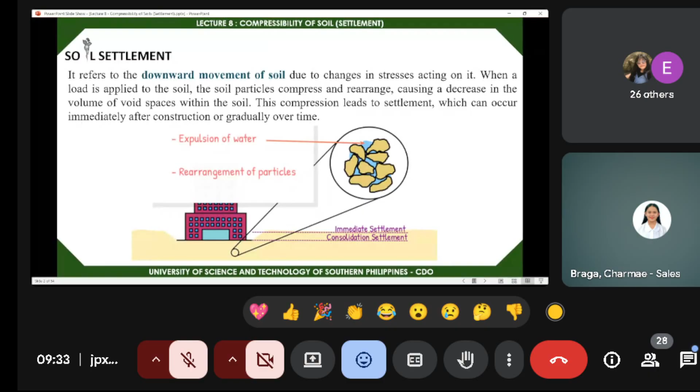And the particles also will be rearranged. This compression towards the soil leads to settlement, which can occur either immediately after the construction or gradually over time.

So if there is stress increase in saturated soil - saturated meaning the soil's voids are fully occupied with water - this causes an immediate increase in pore water pressure.

So the pore water pressure increases when there is an increase in the stress or load applied. In highly permeable sandy soils, drainage occurs quickly, leading to immediate settlement, since the drainage is very fast, the soil particles experience immediate settlement.

Both elastic and consolidation settlement happen simultaneously due to rapid water drainage, so elastic and consolidation settlement happen simultaneously.

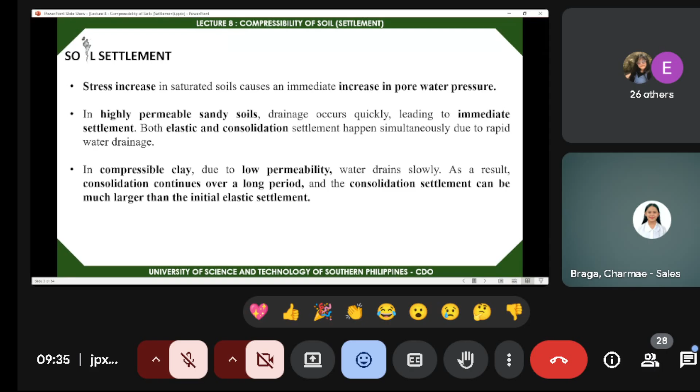But in a compressible clay, due to low permeability, water drains slowly. As a result, consolidation continues over a longer period of time - the drainage takes longer for clay soils - so the consolidation settlement can be much larger than the initial elastic settlement.

So there are three categories of settlement: immediate settlement, consolidation settlement or primary consolidation, and creep settlement or secondary consolidation. The immediate settlement is the most instant response of the soil to the new stress condition.

Again, sandy soil has immediate settlement due to drainage. Primary consolidation is applicable to saturated soil, where as water is pushed out from the soil pores, the soil particles rearrange and come closer, resulting in further settlement, which is called consolidation settlement.

Are you seeing my slide?

Yes, okay. Creep settlement, or secondary consolidation, happens when some soils continue to reduce their volume for a long time, even after the excess pore water pressure has been dissipated and the consolidation settlement is complete.

So once the consolidation settlement is finished, all the water has been expelled from the soil particles, but it will continue to compress or settle slightly more, although very small, but it will take a very long period of time. So we call this secondary consolidation.

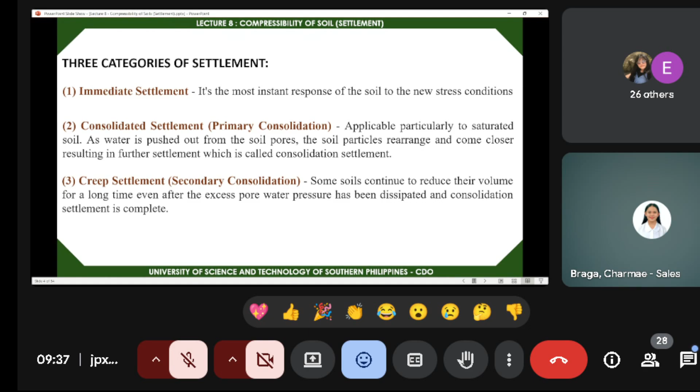Secondary consolidation starts at the end of primary consolidation. Primary consolidation ends when there is no more water that can be compressed or expelled out of the soil particles. Okay, so there is this immediate settlement equation.

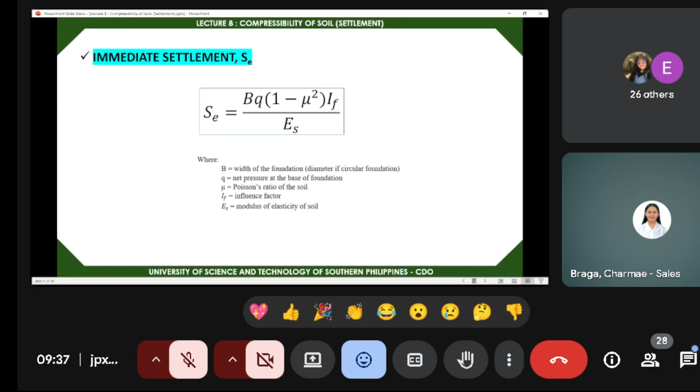S sub E, the immediate settlement equation, is equal to B times Q times 1 minus the square of Poisson's ratio, multiplied by this influence factor I sub F, all over the modulus of elasticity of the soil. This is the formula for the computation of immediate settlement.

For the primary settlement, or S sub C, consolidated or primary settlement, it is delta E, the total change in void ratio caused by the additional load application, over 1 plus E sub O, where E sub O is the void ratio before the application of load, or the in-situ condition of the soil, then multiplied by the thickness of the clay layer.

Take note, class, that it is very specific as H sub C, thickness of the clay layer, since we are talking about the primary settlement. Primary settlement is usually encountered when the soil particles or soil type is clayey, so it will undergo primary settlement.

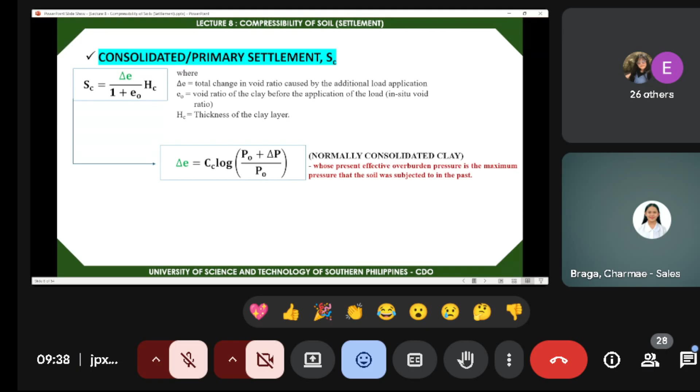The formula for the total change in void ratio could be C sub C times the logarithm of P sub O plus delta P, over P sub O. This is for normally consolidated clay, and the present effective overburden pressure is the maximum pressure that the soil was subjected to in the past.

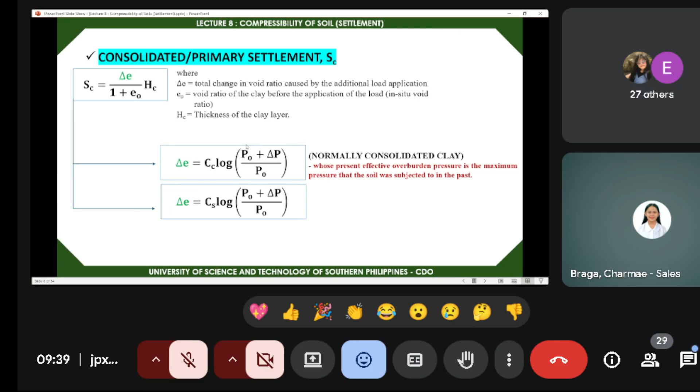That is P sub O, the initial effective overburden pressure. The effective overburden pressure is the maximum pressure that the soil was subjected to in the past, that's P sub O. Of course, delta P is the change from the previous condition.

If the soil is an over-consolidated clay, and its present effective overburden pressure is less than what the soil experienced in the past, then we use C sub S times log of P sub O plus delta P over P sub O.

When the sum of the maximum overburden pressure in the past, P sub O, plus delta P is less than P sub C, we consider delta E as equal to C sub S times the log of PO plus delta P over PO. You have to take note of this for the total.

For over consolidated clay, you have to add this delta E if the clay is over consolidated. Take note class, we're talking of clay, because it is primary settlement. Only clay soil experiences primary consolidation or settlement, whether normally or over consolidated.

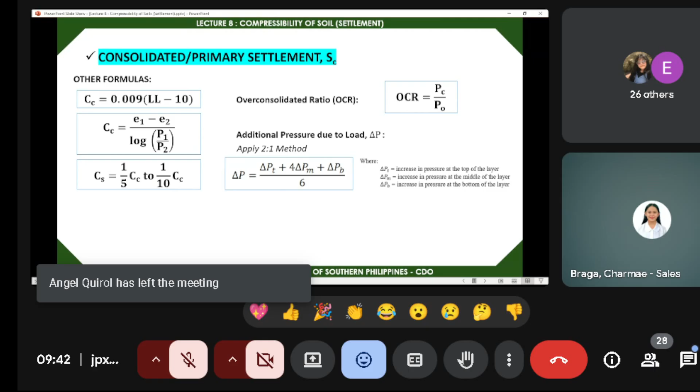You can also solve it using this equation: delta P sub T plus 4 times delta P sub M plus delta P sub B, where T stands for the top layer, M is the middle layer, and B is the bottom layer, divided by 6. That is the delta P computation.

C sub C is the compression index, and take note C sub S is the swell index, where the swell index is usually 1/5 of the compression index. If there is no given value, it can be assumed as 1/5 of the compression index.

PO is the overburden pressure or the effective stress, and delta P is the additional pressure due to load. P sub C is, as I mentioned, the pre-consolidation pressure or maximum effective past pressure.

So again, we can compute for the compression index. We can compute for the settlement by computing the compression index and swell index.

Having this delta E, it's important that you know what to use for delta E. The change in void ratio has this formula, using the compression index and the swell index.

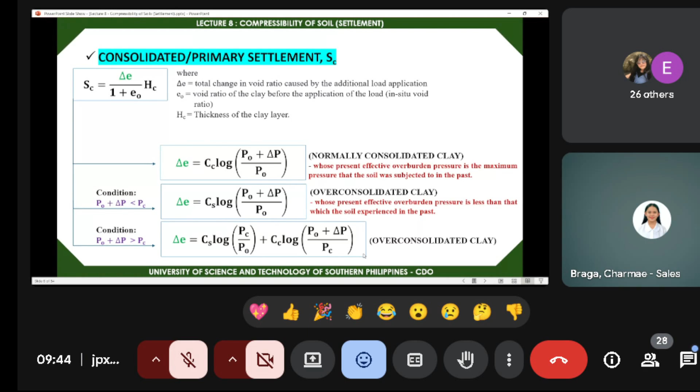With particular conditions of the clay, please familiarize yourself with the symbols, where OCR is the over consolidated ratio.

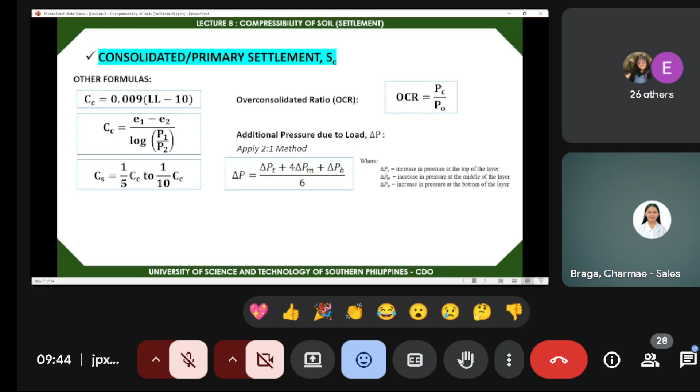OCR simply equals P sub C over P sub O, where P sub O is the overburden pressure over effective stress, and P sub C is the pre-consolidation pressure, which is the maximum effective past pressure before the load is applied. Delta P is the additional pressure due to the load.

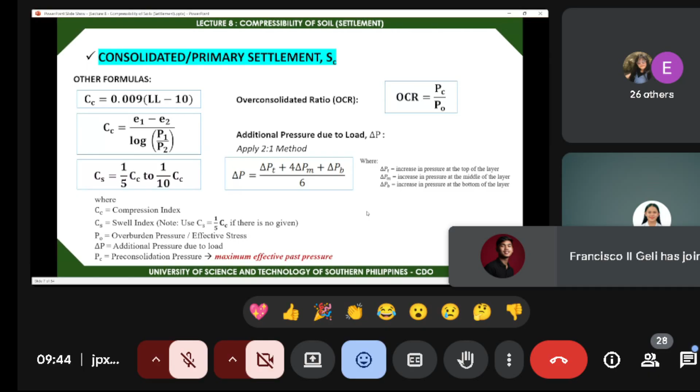Delta P can again be solved using the pressure at the top of the layer, increase in pressure at the top of the layer, the middle of the layer, and the bottom of the layer. For secondary settlement, we have this formula S sub S for the secondary settlement, where there is already the secondary compression index.

This is simply delta E over the log of T2 over T1, where T2 is the time after completion of primary settlement and T1 is the time for completion of primary settlement.

After the completion of primary settlement, T1 marks the actual end of primary settlement, which happens when there is no more water being expelled from the soil. That is the initial period, or also the beginning of the secondary settlement.

Again, take note of the formula for the secondary settlement. It is simply the secondary compression index divided by 1 plus E sub P, where E sub P is the void ratio at the end of the primary consolidation, or simply E sub O minus delta E.

Times the log of T2 over T1.

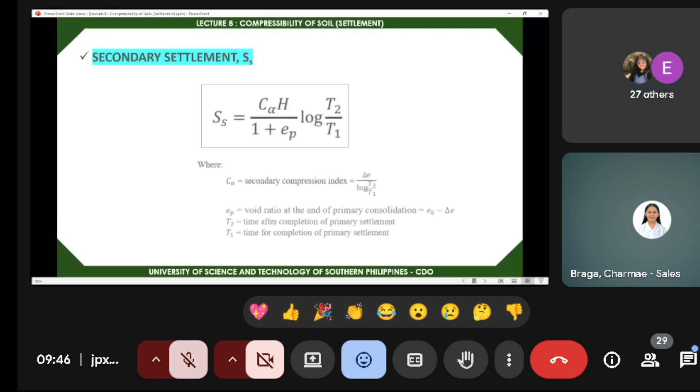So, for an example application, the first example of the compressibility of soil or settlement.

If you have the soil profile in this figure, it has a 9-meter layer of sand underlain by a 6-meter layer of clay.

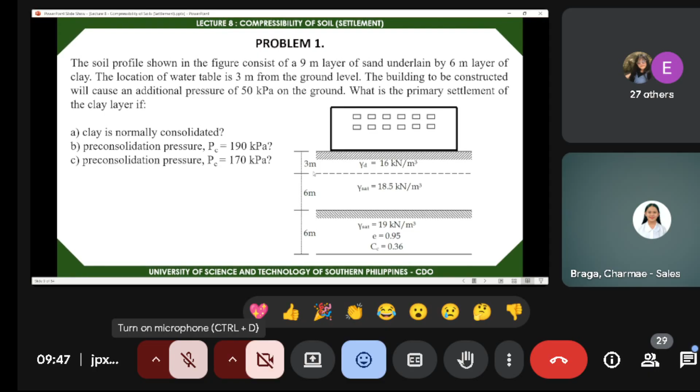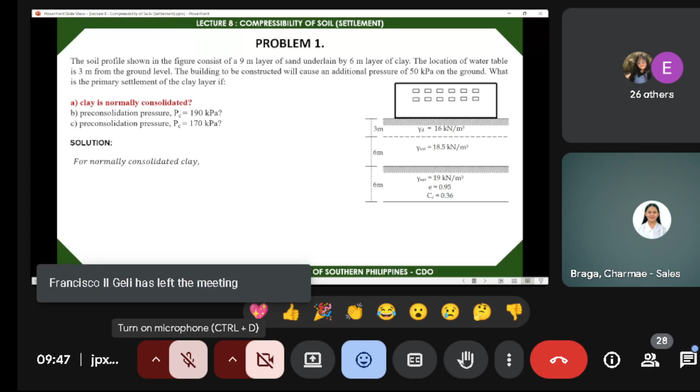The location of the water table is 3 meters from the ground level. The building to be constructed will cause an additional pressure of 50 kPa in the ground. So what is the primary settlement of the layer if the clay is normally consolidated?

Using the formula, for this primary settlement, S sub C, you have delta E over 1 plus E sub O, times H sub C.

Take note that this layer is at mid-height of the clay, so up to the mid-height of the clay. There's a 9-meter layer of sandy soil, then the clay layer is 6 meters below. This clay has a compression index of 0.36 and void ratio of 0.95.

So the location of P sub O for normally consolidated clay is simply at the mid-height of the clay layer. So our PO is again this effective stress.

16 times 3, and then 18.5 times 6 plus 19 times 3. Since it's saturated, you have 19 times 3, and then minus 9.81 of 6 plus 3.

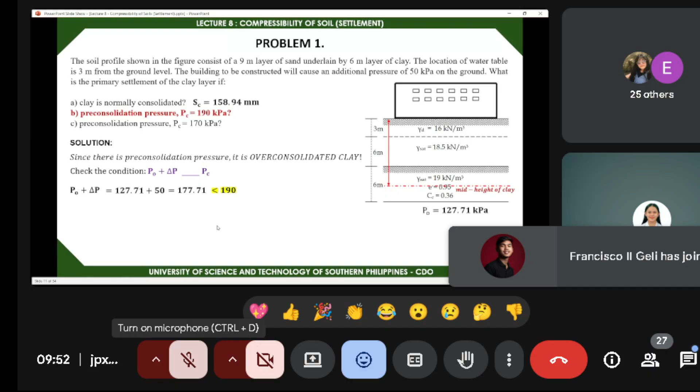The pre-consolidation pressure is the past pressure applied to the soil to determine its settlement, pre-consolidation. So you have there less than 190.

Therefore, we use this settlement formula for the condition of delta E, which equals C sub S log.

So we can see from this condition in our previous slide which will indicate what delta E formula should we use. So C sub S log of PO plus delta P over P sub O.

Therefore, if you input all the given values, since C sub S is not given, we assume it's just 1/5 of C sub C. Then log of PO, which we determined a while ago, 127.71 plus 50 over 127.71.

Then divided by 1 plus E sub O, multiplied by the height of the clay layer, which is 6,000. So again, why is it 6,000 for the height, the H sub C? Because we're talking about settlement, so if you have settlement, it occurs in the clay layer.

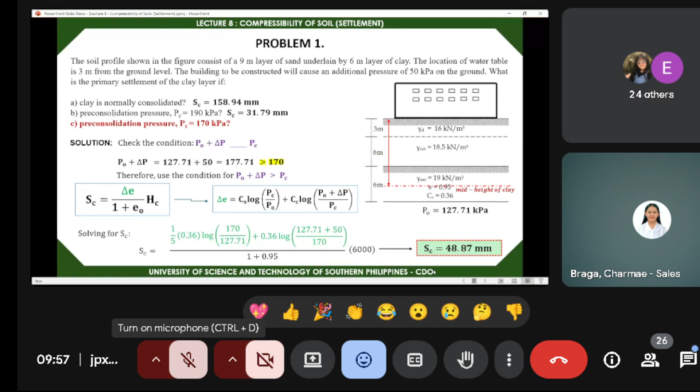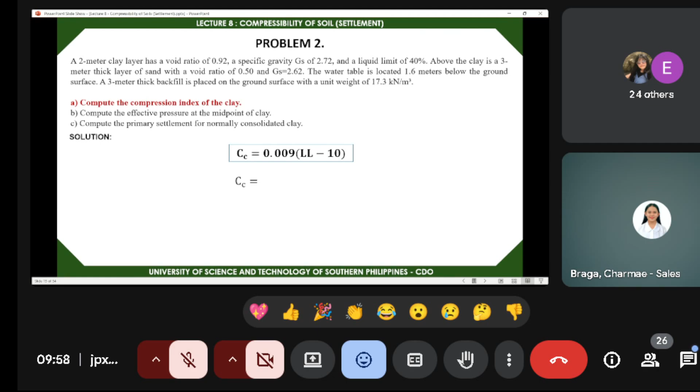Okay, so another example: there is a 2-meter clay layer that has a void ratio of 0.92, specific gravity of 2.72, and a liquid limit of 40%. Above the clay is a 3-meter thick layer of sand with a void ratio of 0.5 and specific gravity of 2.62. The water table is located 1.6 meters below the ground surface, and a 3-meter thick backfill is placed on the ground surface with a unit weight of 17.3 kilonewton per cubic meter. Please wait for a while, I need to call someone.

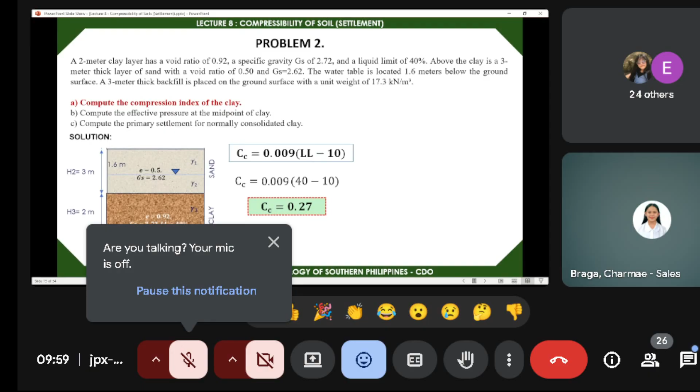Yes, sir. Yes, sir. Uh, yes, sir, 10 o'clock, sir? Yes.

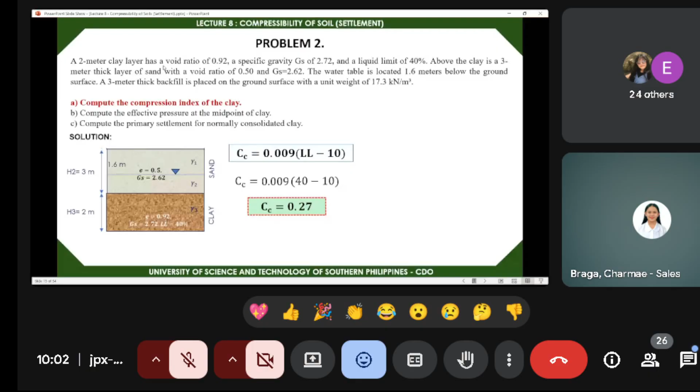What is required is to compute for the compression index. Using the compression index formula 0.009 times liquid limit minus 10, you can get the compression index of the clay layer, which is 0.27. The clay has a liquid limit of 40% given, so this 2-meter clay layer has a liquid limit of 40%. So you have there the C-sub-C.

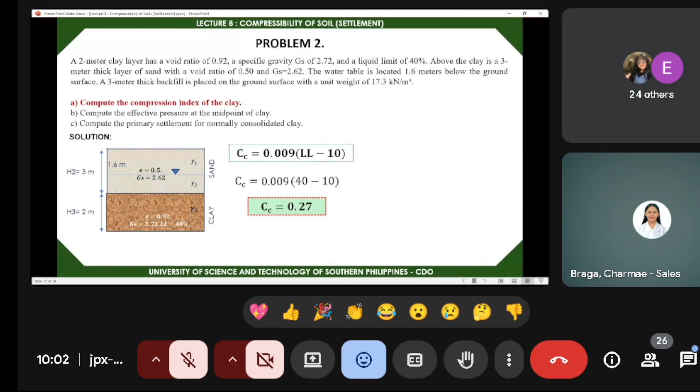The second requirement is the effective pressure at the midpoint of the clay. Where do we get the effective pressure at the midpoint of the clay? Take note there is a 3-meter thick backfill on the ground surface. So what will happen in the computation of effective pressure at the midpoint of the clay? You need to apply the 17.3 kilonewton per cubic meter backfill, with a thickness of 3 meters. If you multiply that, you get a pressure of 51.9. So that backfill is equivalent to a surcharge.

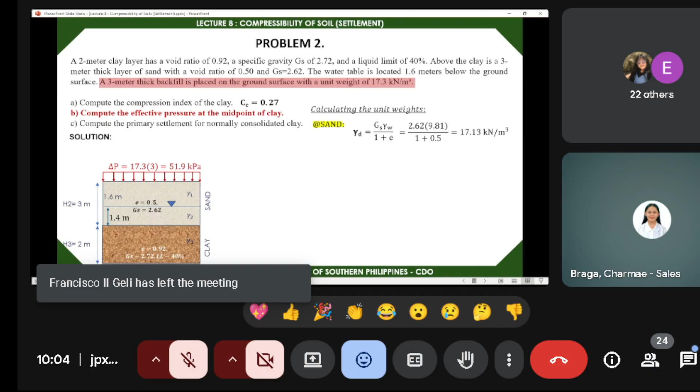So, let us compute the effective pressure. For the sand, there's no unit weight given, but if there's a void ratio and the specific gravity is given, then we can compute the unit weight of the soil. So for the dry condition of the unit weight of the sand, based on the given specific gravity and void ratio, we say that the dry unit weight of sand is 17.13.

Let's continue. So for the clay layer, we can still compute the saturated unit weight of the soil using the formula, don't forget it. So let's start with the calculation of the effective stress at the midpoint of the clay.

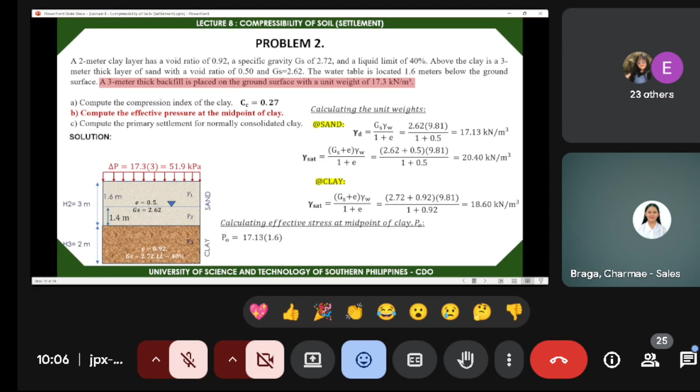Okay, so when calculating the effective stress, you have 17.13 at the sand layer, the dry portion, the dry unit weight of sand from 1.6. Then you have 20.40, that is the saturated unit weight, which has a depth of 1.4 meters.

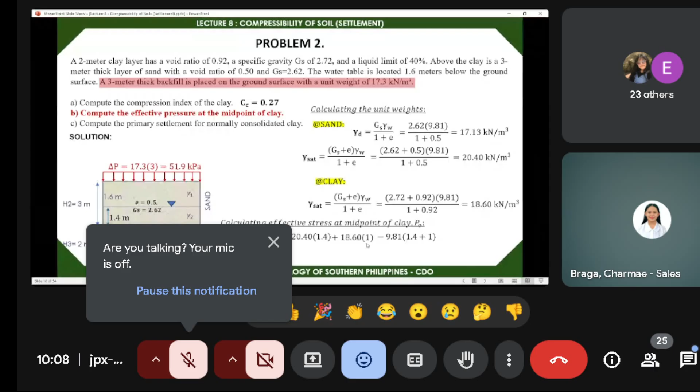And then 18.6, where this is the gamma sat of the clay. Since the clay layer is 2 meters, at the mid of that is just 1 meter. And then minus 9.81, the unit weight of water, at depth 1.4 plus 1. This portion in the clay should be deducted since it's effective stress. Therefore, our P sub O is simply 51.02 kPa.

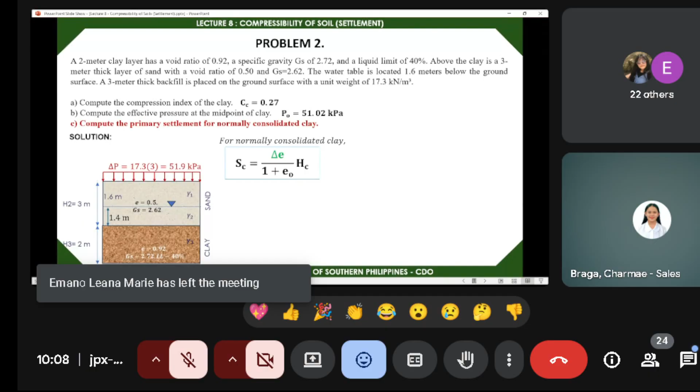So can you follow? Now you have the effective pressure. Now the next question is to compute the primary settlement for normally consolidated clay. So assume that it is a normally consolidated clay. You have this formula for the primary consolidation settlement, with the compression index - do not forget this formula, class.

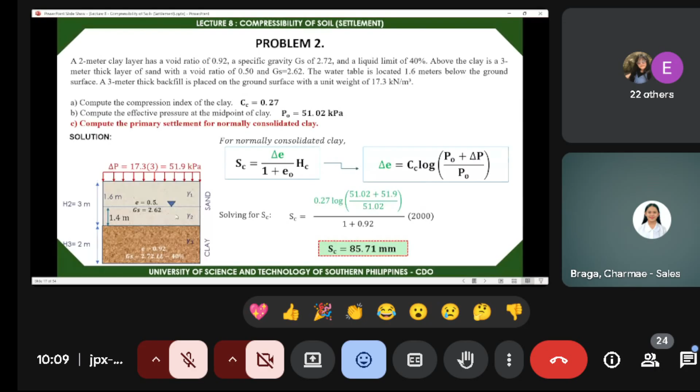So by substituting: compression index is given, which we solved as 0.27, and P sub O which we already determined, and delta P which equals 51.9 - here the surcharge - delta P over 51.02, the P sub O we solved earlier as the effective stress at the midpoint of the clay layer. So for this condition, the primary settlement, given the additional load of 51.9, becomes 85.71 mm. Okay?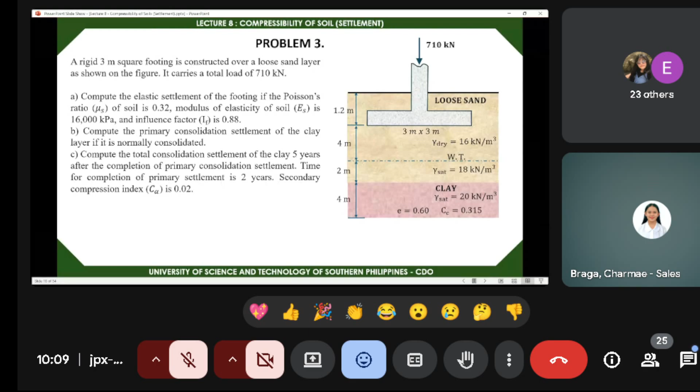So we still have lots of formula problems here. You have to go over this as part of your seatwork - copy and then solve, try to look at these problems. Like the one with the formula for the condition of pre-consolidation, applying the 2:1 method.

So you have the layer, for the elastic settlement. Let's go back - okay, this problem is... so let's take a look at problem number 3.

Problem number 3 is to compute the elastic settlement of the footing, if the Poisson's ratio is 0.32, the modulus of elasticity of the soil is 16,000 kPa, and the influence factor is 0.88. So this is for the elastic settlement, or the immediate settlement. You have this formula: B sub B times Q times 1 minus the square of the Poisson's ratio, times the influence factor over the modulus of elasticity of the soil.

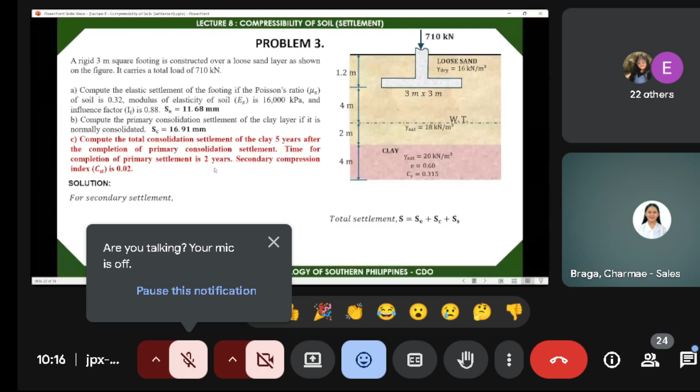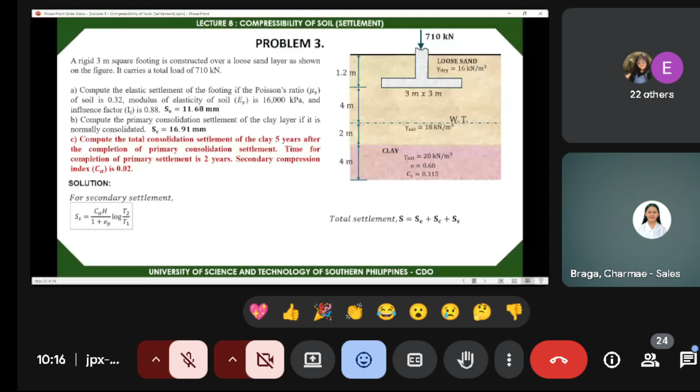The third part is the total consolidation settlement of the clay 5 years after the completion of primary settlement. The time for the completion of primary settlement is 2 years, and the secondary compression index is 0.02. As you can see in the formula, it involves time, T2 over T1. T1 is the end of your primary consolidation settlement, and T2 is the end of your secondary settlement, or time after the completion of the primary settlement.

So for the total settlement, you'll have the immediate settlement, the primary consolidation, and the secondary consolidation. So for total settlement, we solve immediate, then we solve secondary settlement.

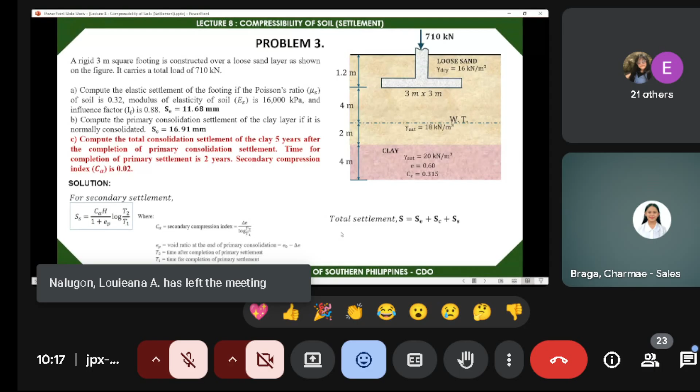So, solving for your delta E for the S of S, you can solve here the settlement. So you will have your total settlement of 48.57.

So we solved this already, the immediate settlement and primary consolidation, in the previous problem.

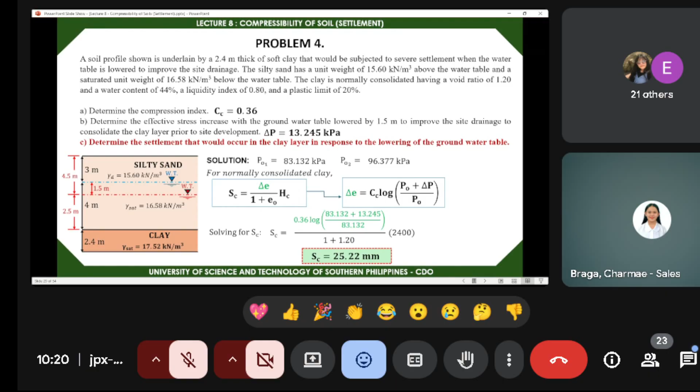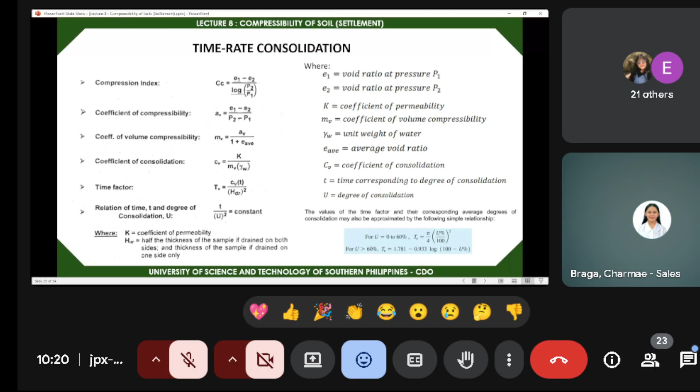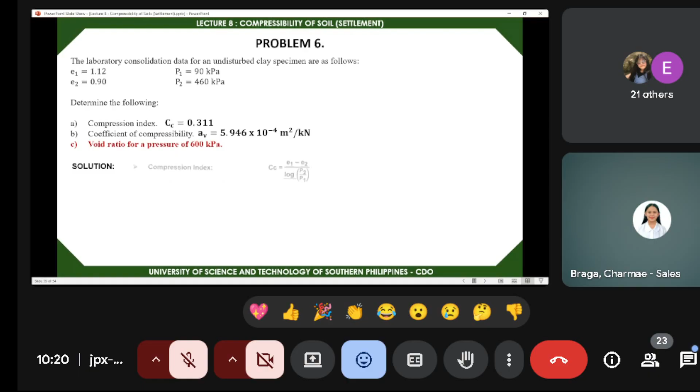So now, time rate consolidation, with very specific formulas that you need to take a look at. It's repetitive, formula-based, rigid. Then you analyze. So you can go over all these lengthy sample problems. Please study this for our long quiz on Tuesday.